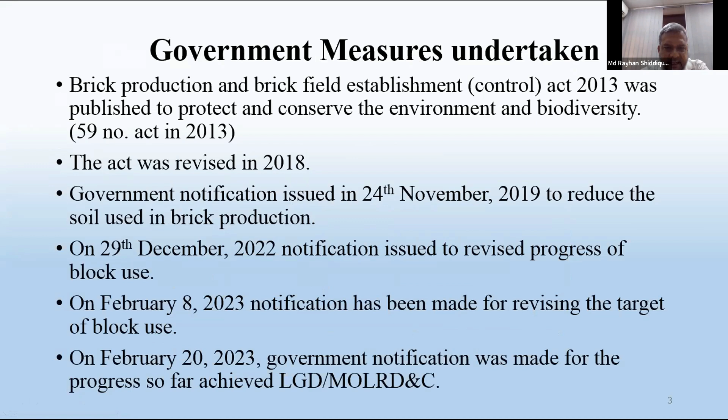In the order, it is said that instead of traditional bricks in building construction or maintenance, boundary wall construction and herringbone bond (HBB) road construction, where we are using traditional bricks, the government targets that by the 2024-25 financial year, we will use 100% blocks. And this is the target you can see. So another thing: we have to come out from traditional bricks and use eco-friendly bricks.

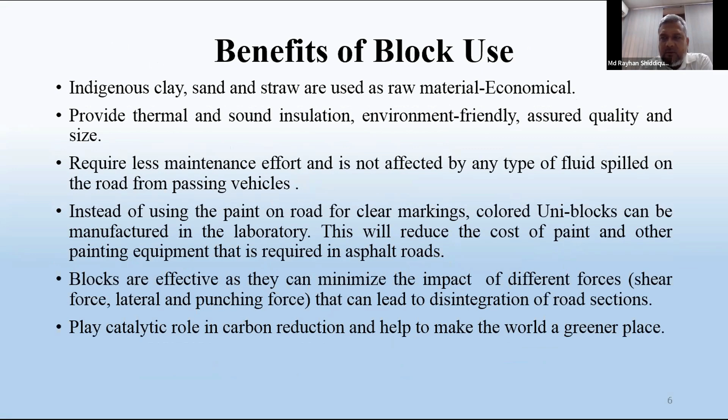What are eco-friendly bricks? They will be made from indigenous materials: clay, sand, and straw. And here carbon emission is low. And if we use these blocks, then our country can be environmentally advanced.

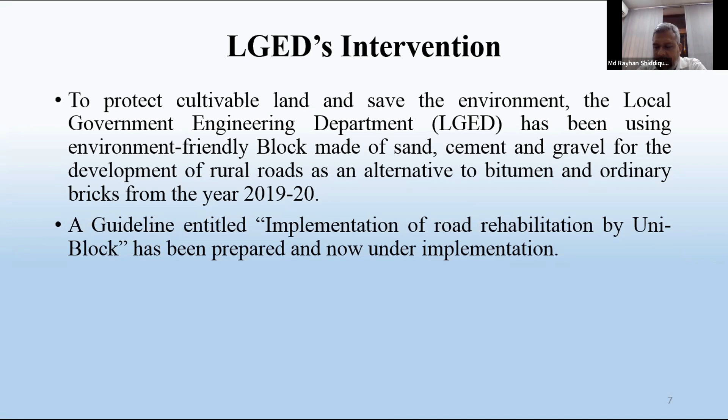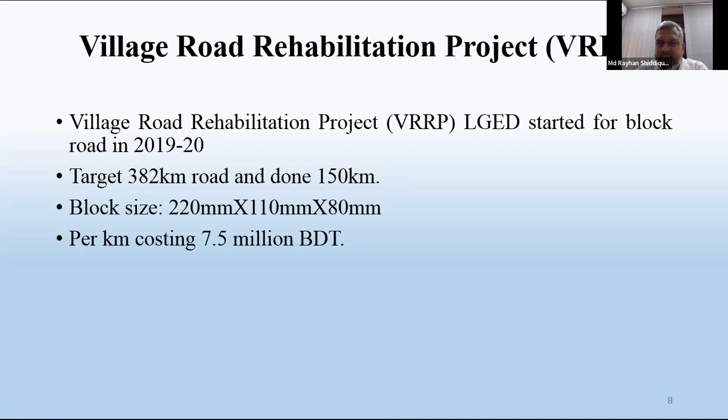Regarding this, LGED took the initiative in 2019 of using these eco-friendly blocks, and a guideline has been approved by our department. And in LGED, there is a project, the Village Road Rehabilitation Project. In this project, the target is fixed that we will construct 382 kilometers of road using block road. The block size is 220 millimeters by 110 millimeters by 80 millimeters, and we will use this in village roads. The per kilometer cost is 7.5 million Bangladeshi taka (BDT). Till now, we have constructed 150 kilometers of road. This is one project initiative.

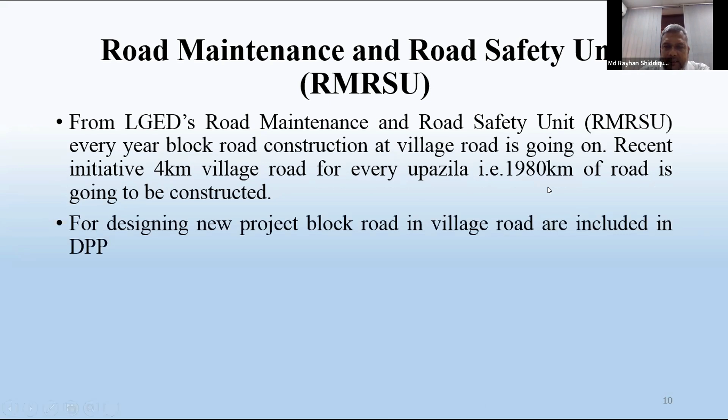We have a strong road maintenance and road safety unit, and yearly we got approximately 3,000 crore Bangladeshi taka. And by this program, every year we are constructing the village road using block road. And recently, this unit fixed a target that in 495 upazila, they will construct 4-kilometer road, that is 1980-kilometer road will be constructed.

Another design initiative by our planning unit. LGED has a strong planning unit. All the development project proposals are finally checked by this unit, and for designing new projects we are giving the provision that every project should use the block road for designing new projects in the village road.

Another two major departments, I have personally talked with them, the Public Works Department. Public Works Department, they are also following the target fixed by the Environment, Forest and Climate Change Ministry. And also Roads and Highways Department, actually there is a waiver for base course and sub-base course construction. Yes, because we have to think of the demand and supply. How many bricks are we constructing? If we are not getting the alternative, so that is why for base course and sub-base course in road construction, there has been some waiver.

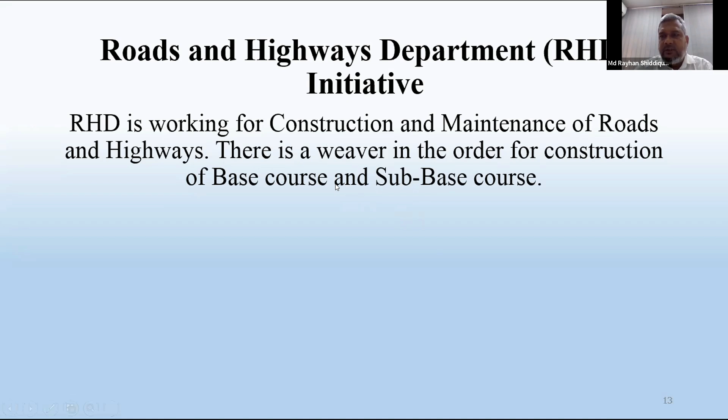So they are constructing major roads and highways. So they are taking some initiative for innovation of alternative material. How can we reduce the use of traditional bricks? So my recommendation is, the public sector has been working on block road construction, but what about the private sector? In the private sector, building and other things, we have to think about that.

And brick production and utilization analysis are needed. What is this? Every year we are manufacturing these bricks. So these bricks are utilized in different sectors, public sector, private sector. In the public sector, road construction, building construction, footpath construction, and different ways. So we have to analyze, and according to plan, I think we have to also include the private sector to motivate them not to use the traditional bricks. So in that way, we can phase out the use of traditional bricks. You can see in the block road, the maintenance cost is very, very low. So we can easily use this.

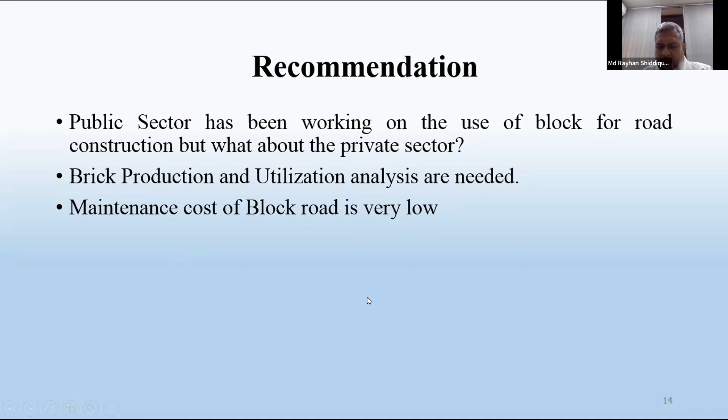From my side, this is my presentation. But actually, our country is a highly densely populated country, and from every sector we have to take initiative for using the eco-friendly brick solution, and not to use the traditional bricks.

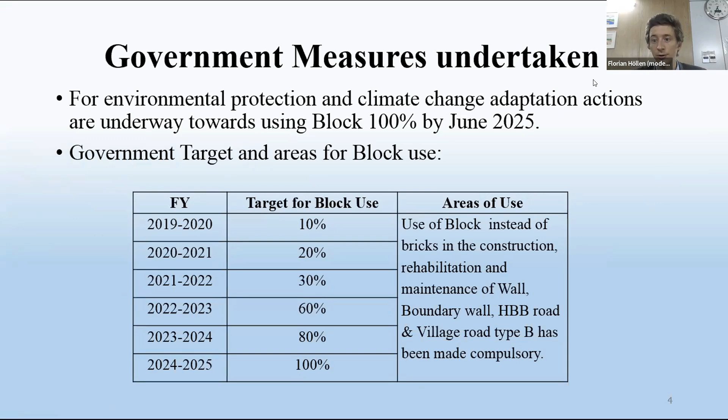Thank you, Mr. Sidike, for giving us not only an idea about the genesis of these political decisions and the different steps taken at different points in time by the government, but also the different approaches by the different institutions who are related to construction and thus also to the adaptation infrastructure and the initiatives, but as well the challenges that you mentioned, the demand and supply question, so that there is, as it seems, not enough supply, if I got it correctly. And also one major point was that now we are talking about public procurement, which is often spearheading new innovations, but we should not forget about the private sector. And this is something I think we need to take into account.

I have just one question for clarification. If you are talking about blocks, what exactly do these blocks consist of? Actually, the block consists of sand and cement. And in some cases, if we want more strength of that block, then we can use some coarse aggregate, 6 millimeter, 7 millimeter down sizes. So these are the materials. Okay. The cement, sand, and some gravels. Okay. Small size gravels. Thank you.

Like, how much is the cement share? Actually, that will depend on our strength. The ratio is the cement, sand, and the pea gravel. That is 1, 1.5 and 3.

So first about my organization. Housing and Building Research Institute is an autonomous body under the Ministry of Housing and Public Works. In 1975, the father of the nation, Bangabandhu Sheikh Mujibur Rahman, established this institute, as earlier it was a center. This institute was set up for the development of housing using indigenous materials and technologies for rural Bangladesh. We do R&D for sustainable building materials and technology development. We also do environment-friendly structures and disaster-resilient infrastructure, so we have lots of work and activities in coastal areas of Bangladesh.

We prepare policy in the field of housing and building. We develop the National Building Code and housing policies. We collaborate with national and international organizations, universities, and development partners as well. We have several projects with them. We also perform capacity development programs like training for professionals, architects, engineers, and we even organize training for construction workers as well as for students.

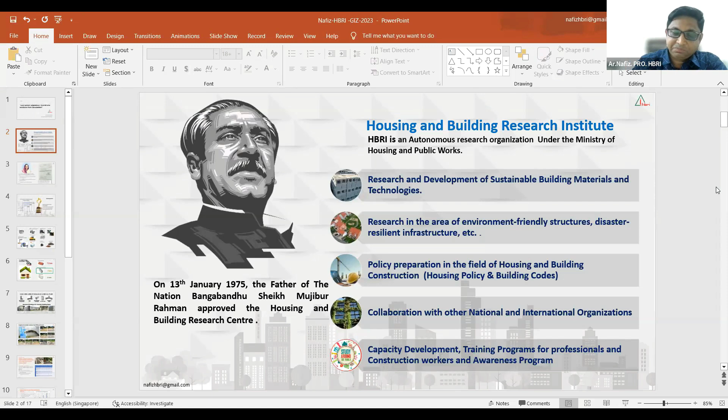Now come to this topic. HBRI has been working in this sector, developing eco blocks, 30 years back. But earlier, our perspective was only climate change issues, because we tried to eradicate the clay burnt brick with the block. But later on, in 2014, our Honorable Prime Minister visited the Ministry of Housing and Public Works, and she gave us the instruction to produce alternative blocks from dredged sand. Bangladesh is a riverine country, and we have huge silt every year, and due to this riverbed elevation, every year river bank erosion happens and people become homeless. So she gave us the idea whether we can do research and develop the block with dredged sand.

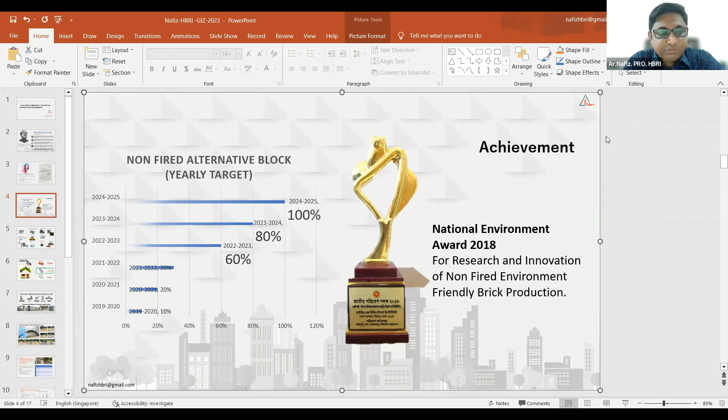They also passed another gazette notification that by June 2025, all government construction should be done with alternative blocks, green blocks. Based on our research, we achieved a National Environment Award from the Ministry of Environment. And now, to fulfill the target, we are performing several research projects, almost 27. But out of them, we are mostly focused on block development, or eco block development.

In the first research, we are trying to develop a chemical admixture to make a stronger block. We are also working to develop a block from plastic waste. You know that plastic is another problem we are facing. In another research we are conducting now, we are developing blocks from ETP sludge.

You know that the Department of Environment now has a policy of zero discharge ETP. So we can reuse the fluid, but we can't reuse the sludge. So sludge is a big problem for them. So we collected some sludge from garment industries, and we have successfully developed some blocks. You can see in the photograph.

Besides that, we are also working to develop a block using iron slag, because iron slag is also abundant in the steel industry. And we are also trying to develop aggregate from the block. You know that for roof casting and column casting, till today there is no alternative to brick, fire brick.

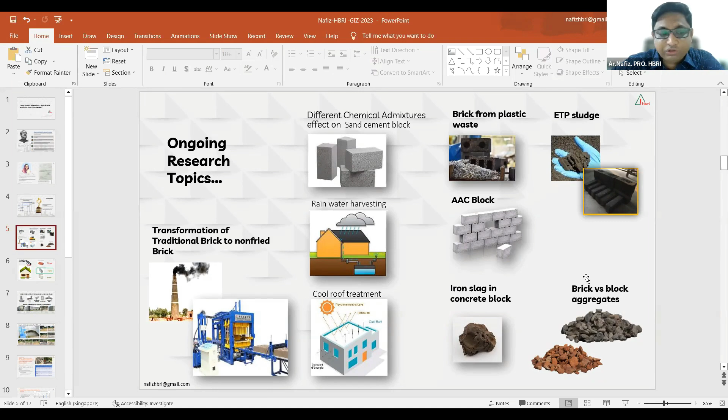And as our LGD colleague mentioned, we already prepared a block with dredging sand, which is more than 5,000 psi for them. So now they are using it in their roads and other infrastructure.

And this is another slide I'd like to share. This is the direct carbon emission that we can reduce if we use blocks. This is a typical 1,000 square feet floor house. For only wall construction, if you use clay burnt brick, it will emit around 7.2 tons of carbon for the construction period. If you use hollow block, it can reduce almost 3 tons; the emission will be 4 tons.

And if we go further and use AAC blocks, autoclaved aerated concrete blocks, it will emit less, 3 tons. You know that cement is also not environment friendly, but due to the porous and lightweight nature, we get this benefit. From the beginning we are focusing on hollow concrete blocks, and later on we'll focus on AAC blocks. These eco blocks and eco technologies are in the pipeline in our market, and products are available.

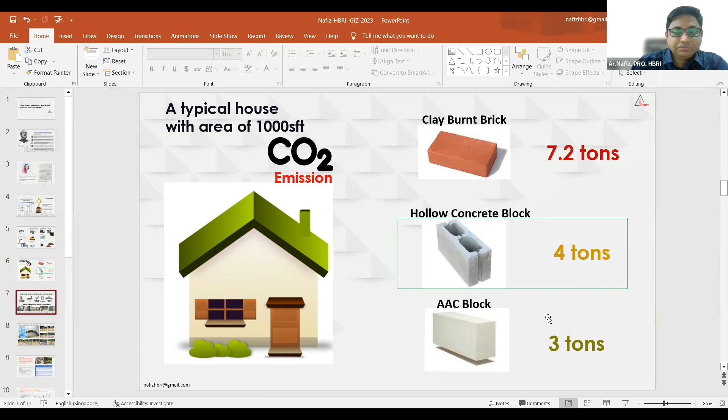This is another innovative building method we have developed at our institute. We developed sand cement block, as I mentioned earlier. We developed CSEB, compressed stabilized earth block, sand cement solid block, thermal block, interlocking blocks, and we use these blocks in our buildings. We made some pilot projects on our premises and in other parts of the country, observed them for a long time, and now these blocks are tested. We have 30-year-old buildings and 10-year-old buildings.

So these technologies are tested, because people used to ask us whether brick's life is long, but what about the concrete block? So we did research, and as the sand block is like concrete, its life will be more than 50 years, up to 100 years. So there is no risk to use this sort of block.

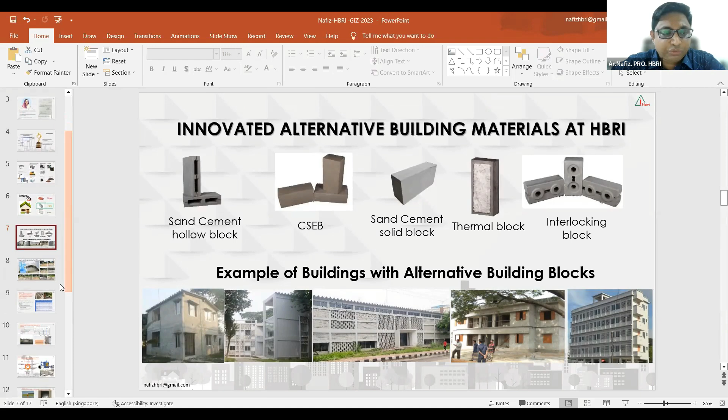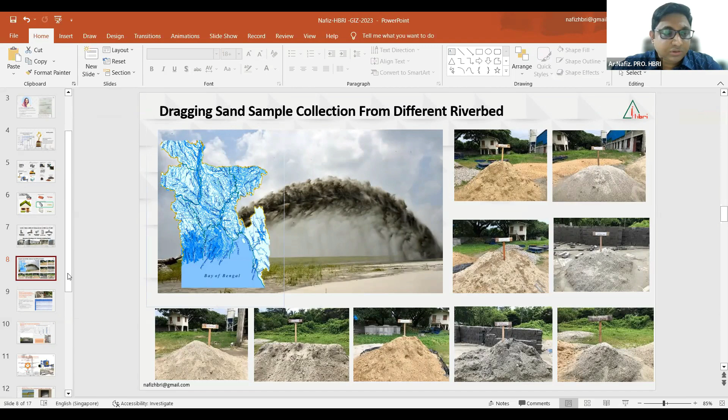So we note down the FM, fineness modulus. Fineness less than 2.5 is fine sand here, and then specific gravity, salinity, because some parts of Bangladesh, mostly the coastal part, have saline water, and TDS, pH, and other things. The block is mostly made of cement, so that's why we need to know the sand properties, so that we can give them a recipe for better bonding.

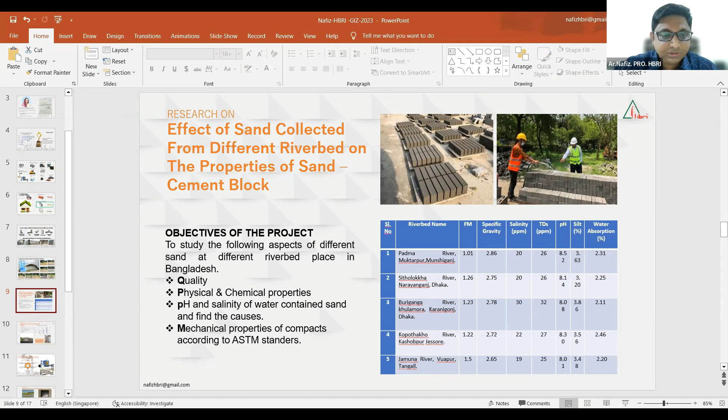And we have another program. Actually, I started this when I was working in SREDA. At that time I used to work with one GIZ program, the REAP program. We provided support for rice husk rice parboiling systems to improve the energy efficiency of rice parboiling.

And during my visit, I found that we improved their parboiling system and made their production cleaner and more energy efficient, but they were facing a huge problem with the ash. There is no use of rice husk ash, so there is a huge problem of dumping the ash. So I started working with this ash and developed a protocol to make blocks and bricks from this rice husk ash.

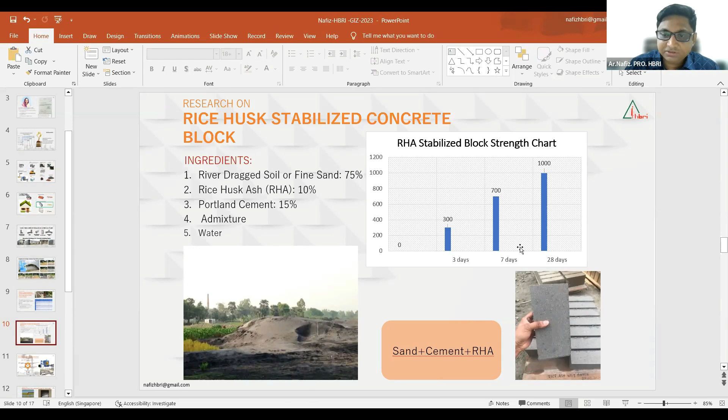And what we found, you can see the strength: after 28 days, the strength of this block is 1000 psi, pounds per square inch. This is very good for walls, and it has good insulation properties and other properties as well. One paper was also published on this research. And this is another research, I think the most timely research we are now pursuing at our institute.

We have officially almost 7,000 brick kilns, but unofficially more than 11,000 brick kilns in Bangladesh. This is the traditional building technique. It requires coal burning, almost 5.68 million tons, and it requires 3,350 million cubic feet of soil, mostly topsoil. And it emits almost 15.6 million tons of carbon.

So now our target is to convert these traditional brick fields into what you see on the right side of the slide, the alternative and new technologies. We are working with the traditional brick owners association, trying to educate them and invite them to convert their factories. This year we submitted a project to our Ministry of Environment and Climate Change to support at least 20 pilot projects.

But this is a huge market. From our findings, a 700 million investment is required for this transformation. So a huge investment program can be done, and we are looking for development partners and technical partners for this project. There is a huge appetite in Bangladesh.

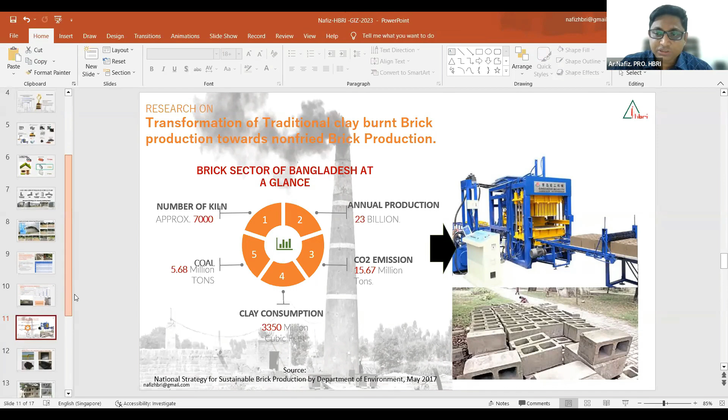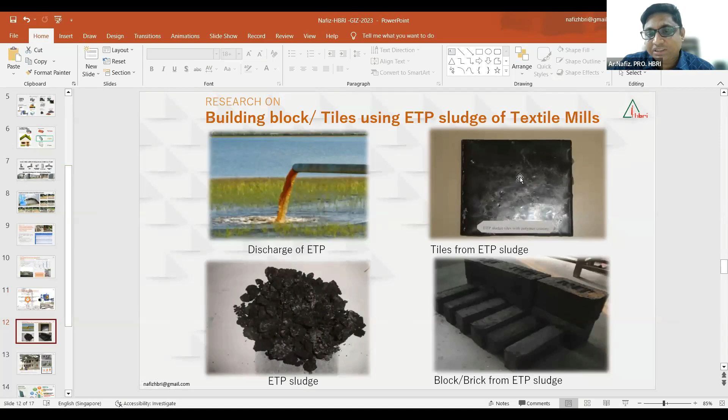As I stated earlier, this is the ETP sludge block. ETP waste is all dumped on agricultural land, so we prepared good tiles and blocks successfully at our institute. And this is another research we performed 15 years back: the first totally recycled building from demolished concrete buildings.

Usually they dump demolished blocks on agricultural land and some road networks, but the economic value is not there. We prepared blocks with this, and the strength is huge. After 15 years, the strength has gradually increased. If you use cement-based blocks, the strength gradually increases. So this is another good finding we have.

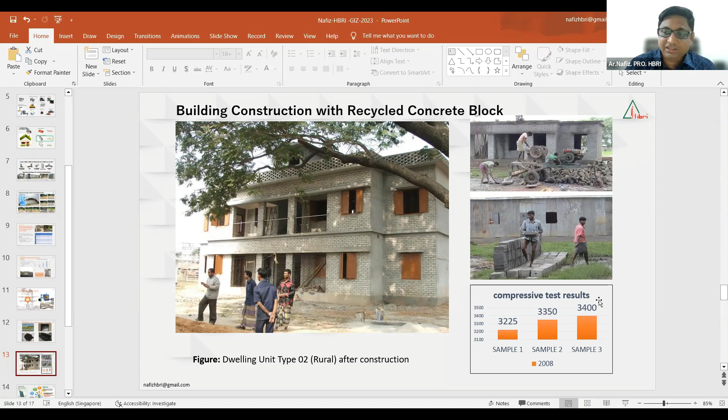We included the block provision in the National Building Code. We also developed another standard guideline for rural housing. We mentioned the provision for this block in the national policy and also in the building energy efficiency and environment rating, so anyone using this rating has to use concrete blocks, eco blocks. Even Bangladesh Bank has a financing policy in which blocks are also mentioned.

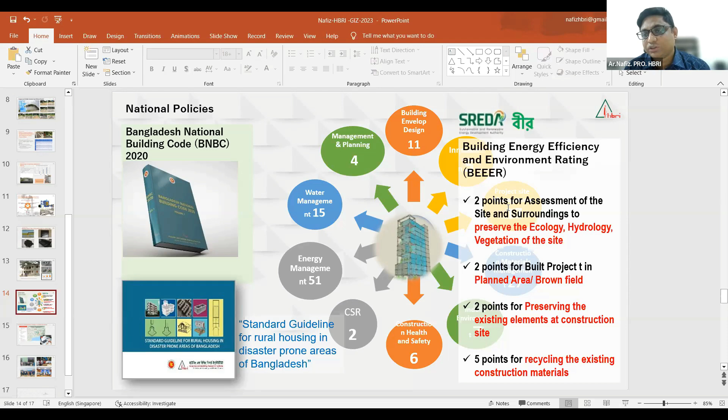This is another work done by us. We prepared a map on our website, so anyone who wants to use blocks in his nearby area can search our website and find the producers, companies and factories, making it convenient for block users. Nowadays we are also listing machine suppliers, admixture suppliers and cement suppliers. So we are trying to make a platform on our website to help these activities.

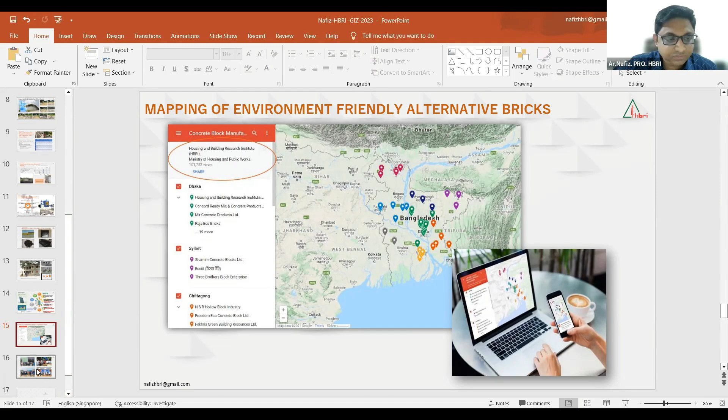We actually almost every year visit some block factories just to promote and to find out their problems, to troubleshoot their problems. And almost every day, block entrepreneurs come to us and they seek support from us, and we provide support. Sometimes we write to NBR for tax relaxation, sometimes we write to the Department of Environment for environment clearance, and sometimes we write to banks for their soft loans.

So actually, we are from HBRI. We are working as a help desk here to achieve the target set by the government by 2025 to use blocks in all government buildings. And beside that, we arrange some TV shows and other programs as an awareness part, so that the normal private sector also comes up with the use of blocks.

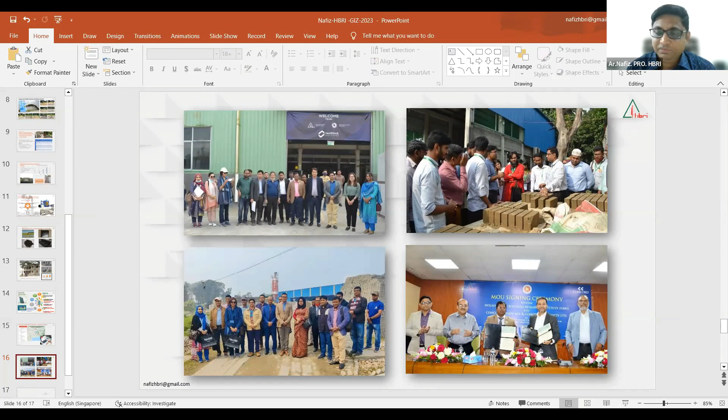Great. Many thanks, Dr. Nafisur Rahman. You gave us a very intense presentation. I always wanted to interrupt, seeing the time, but every slide was so great that I didn't know where to do it. So many thanks, because you gave us a concrete idea about the different options that are there, the very wide spectrum.

And I think one aspect we can look into during our discussion after the two other inputs is the question of how far the bricks we are producing are also recyclable, or what happens to this matter afterwards, particularly if we are using effluent treatment plant sludge or also plastic. And thanks also for putting up the topic that cement is also not environmentally friendly, and differentiating between the different alternatives we have.

From this very wide spectrum of activities and research findings you presented, I would like to go over to someone who is, with his company, a social enterprise from Belgium, actually building houses with eco-bricks in Bangladesh, Mr. Willem Gaines. He's the managing director of Inclusive Home Solution Limited. You have been doing research here and have a long history in Bangladesh. And you are now focusing on compressed stabilized earth blocks, CSEB. So please share your experiences with us.

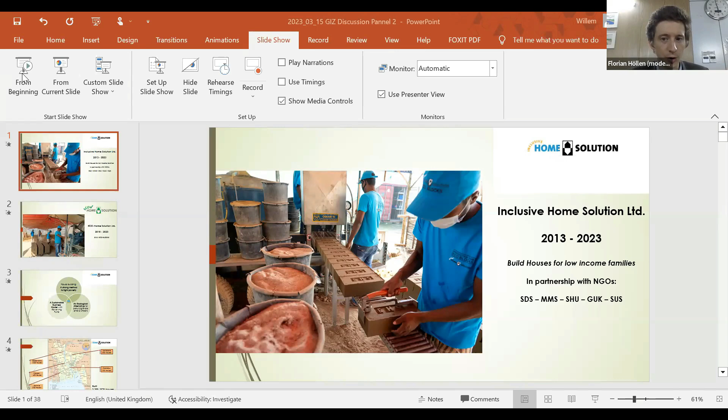Okay, thank you very much, Florian. I hope you can hear me, because I'm in a spot where the network is slow. If you allow me, I would like to share my screen. Is that possible? We hear you very well. Regarding some questions I received, it's well noted, but I would like to take them after the panelists, and then start with the questions posed already. Okay, I hope you can see my slides now? Yes, everything okay. Very well. And please try to limit yourself to about 5 to 7 minutes.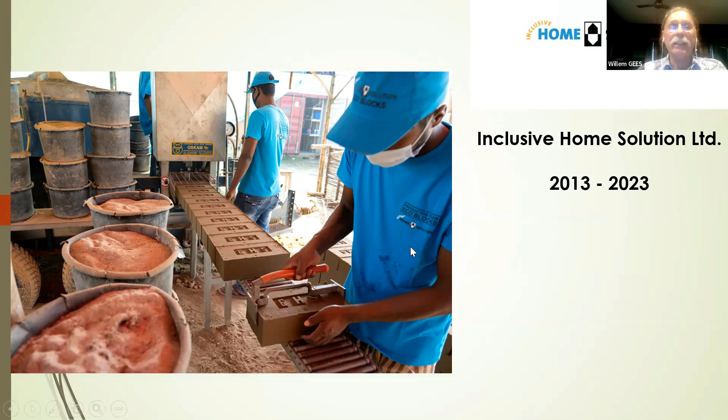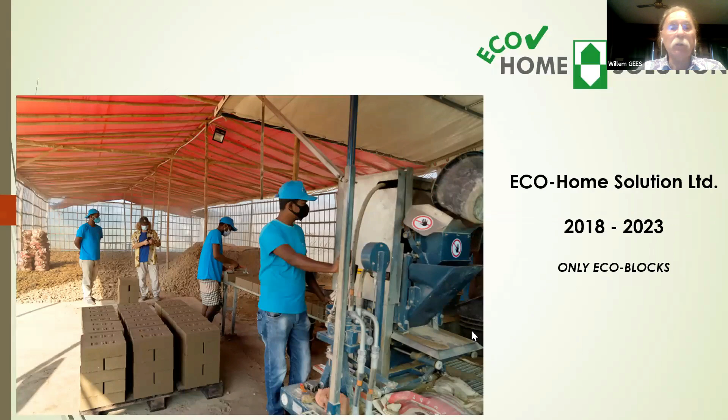I will try. So we are a company which started in 2013, especially trying to build houses for low-income families with local NGOs. And 5 years ago, we changed into an ecological project making compressed stabilized earth blocks. We try to combine our social view that a house is a strong system to fight poverty, but it should be ecological. So that's where we are fighting.

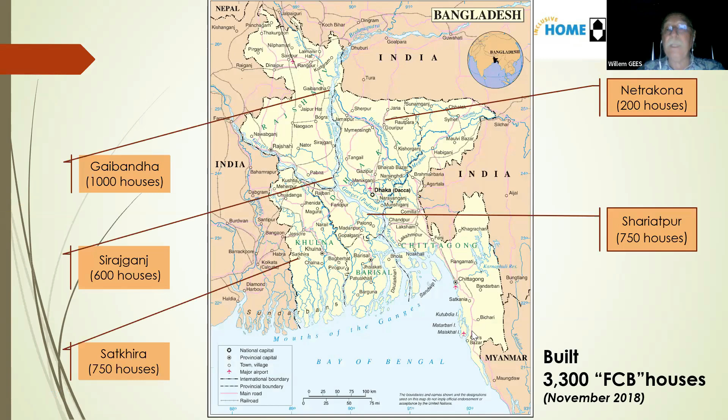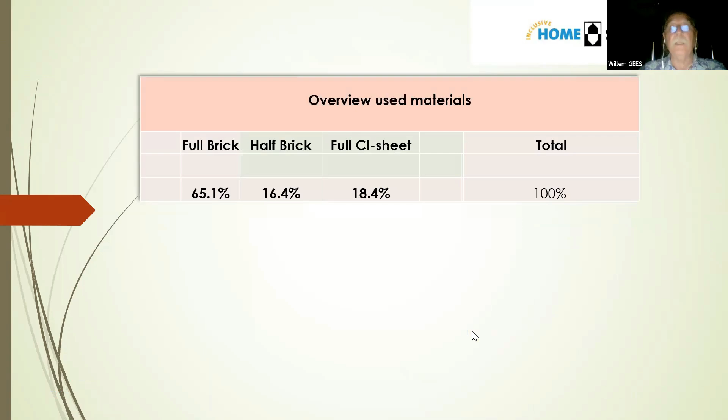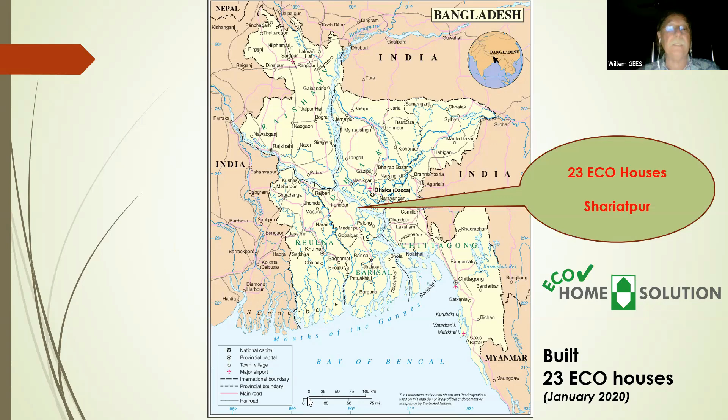We built about 3,300 houses in Bangladesh in different areas, and we saw that most of the houses were built with bricks. So that's why we decided to start an ecological alternative, and we wanted to develop compressed stabilized earth blocks. We did it in Shariatpur, where we built 23 houses. We then moved to Nilphamari, where at present we're still active, and we built 37 constructions. We are now starting in Mymensingh.

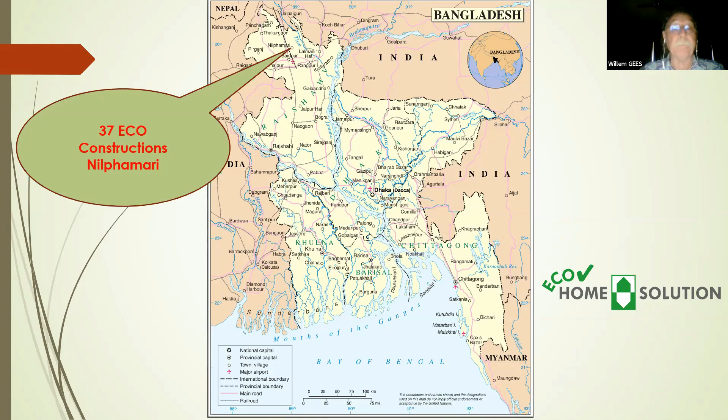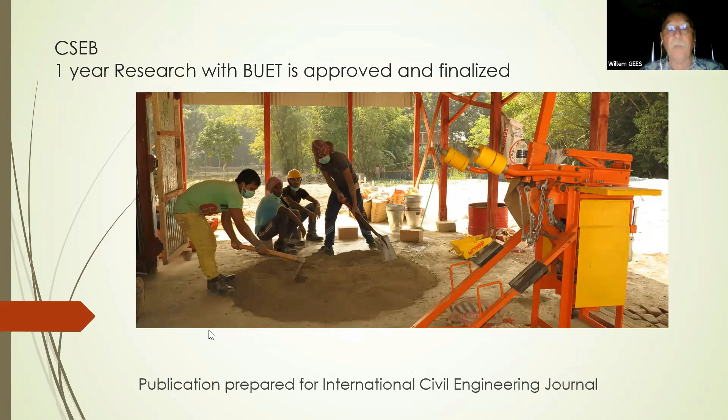Before starting, we did research with BUET to develop a compressed stabilized earth block which was high quality. And we imported a machine from India. This is the manual machine, which HBRI will definitely recognize. It's the Auram press, which we used for the research. A lot of research was done to find the right mix to have a block of good quality.

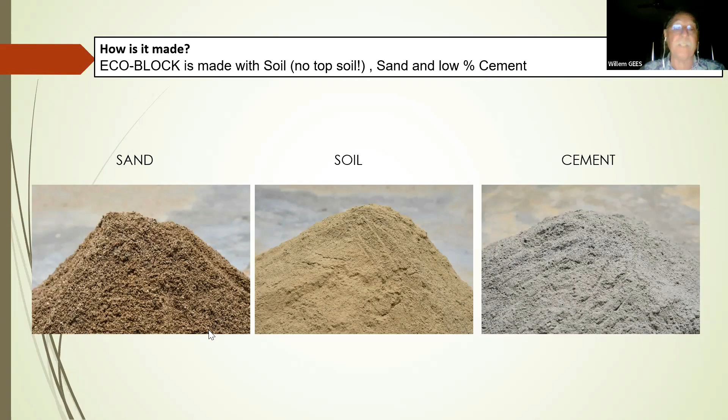So we imported the machine from the Netherlands, and this is our block. We are using sand, soil, and as little cement as possible, because we are really concerned about the pollution of cement, which is not made in Bangladesh, but we are talking about worldwide pollution. So we should not only think about local pollution, but also the origin of the cement, which is burned. And during the burning process, we all know a lot of carbon dioxide is put into the air.

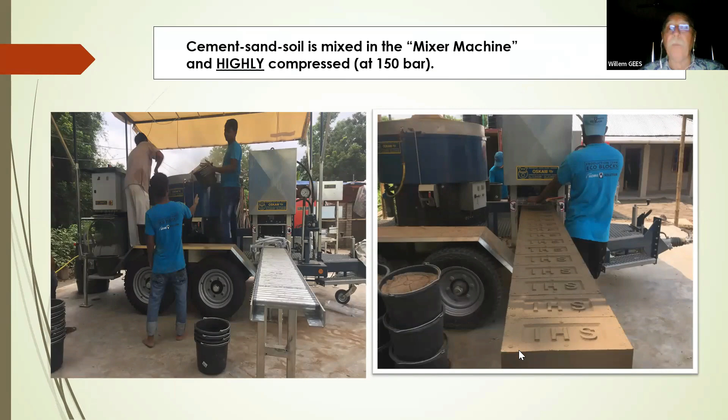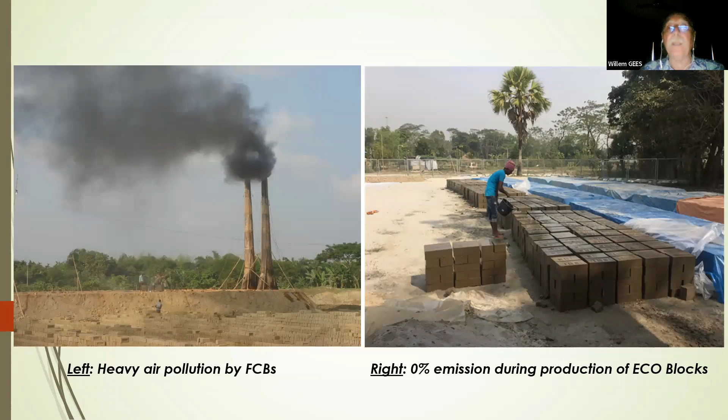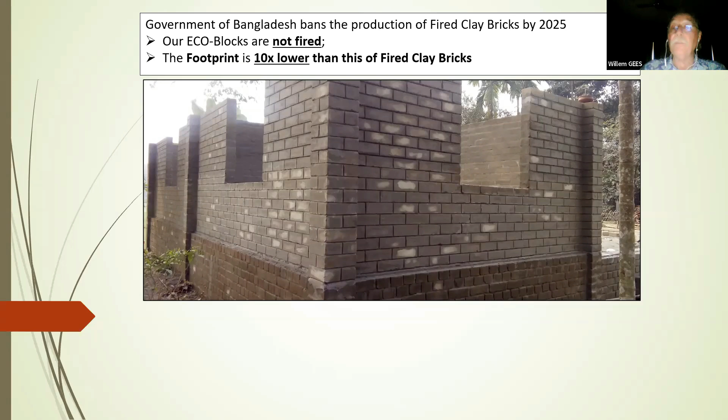So our blocks are compressed under a high pressure. I'm just trying to see my screen myself: at 150 bar, which is quite high. And by this, we managed to get a block which has a high compressive strength after 4 weeks curing. We can always test the blocks at BUET, and left and right we can see the comparison. We have no pollution, no burning. So with our blocks the pollution is much less. And you can see here, we calculate that we have 10 times lower emission than the fired clay bricks.

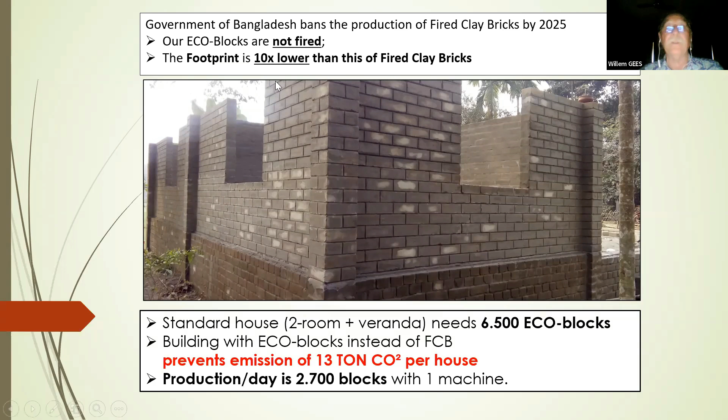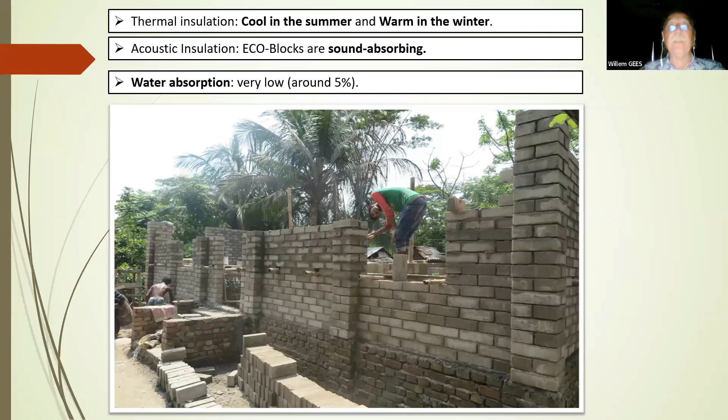Okay, during this construction, everything is not going very smoothly. We realize that it is difficult for people to accept a new product. Even if our product is very good for thermal insulation, that is also something which we consider as a plus point of our blocks. It means that less air conditioning will be needed. Water absorption is very low, and the compressive strength is 15 MPa, which is quite high.

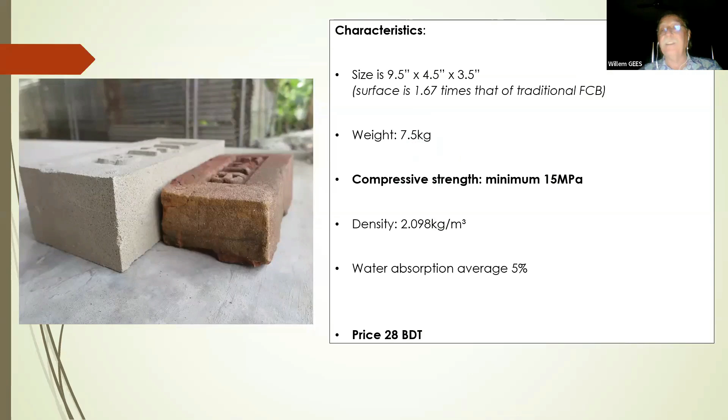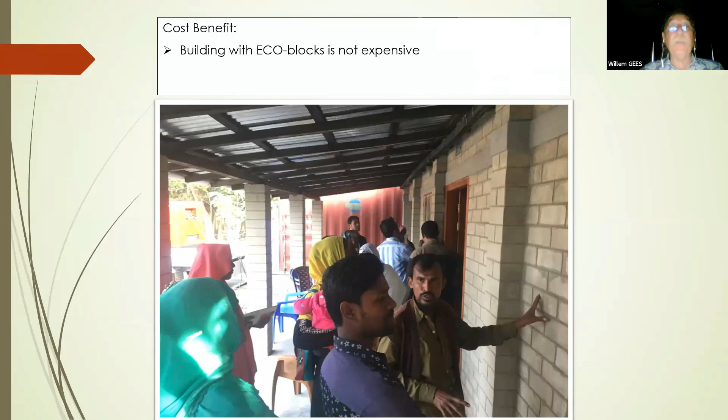The blocks that we produce are bigger than the bricks, and that is a kind of a problem, because people say the block is too big, it weighs too much. So we have to try to explain to people that, okay, the block is bigger, but if you calculate, it's not more expensive than making a wall with bricks. You need fewer blocks to make a 100 square feet wall. You don't need to plaster it, which means 30% of cost.

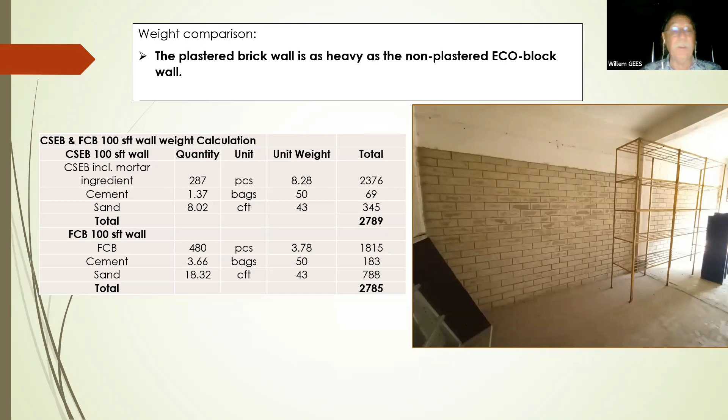And this is something we have to explain to many constructors: even if the block is heavier, the weight of the wall is not heavier compared with the plastered brick wall. We calculate it and then try to convince the people who want to build with our blocks. The block is really a sustainable block. I think it will last lifelong if you treat it properly. These blocks in Tamil Nadu are from the handmade press, and they're already 50 years old.

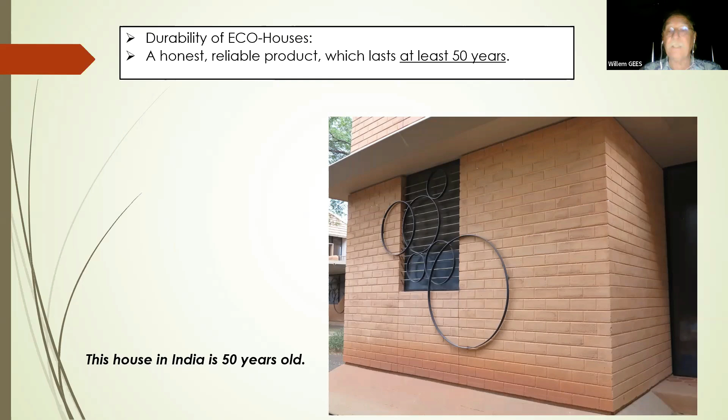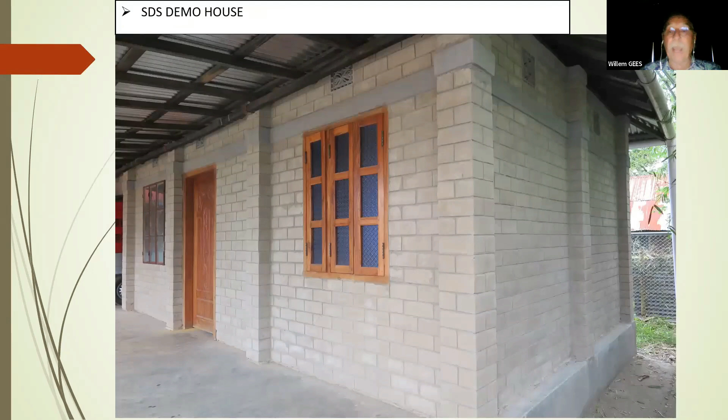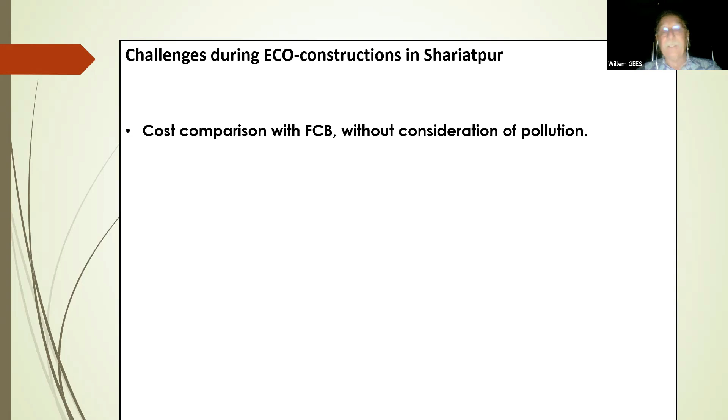It lasts long. So I'd like to share some of the construction, just to see that we built quite a lot of houses already. I will not show too many because we have no time, but they are very beautiful, very comfortable, very high quality. And we had some challenges: people always compare the cost of the block with the brick without taking into account the cost of the pollution. Pollution is a very expensive thing. We will see this for many more years due to the disasters that are coming and are creating a lot of damage.

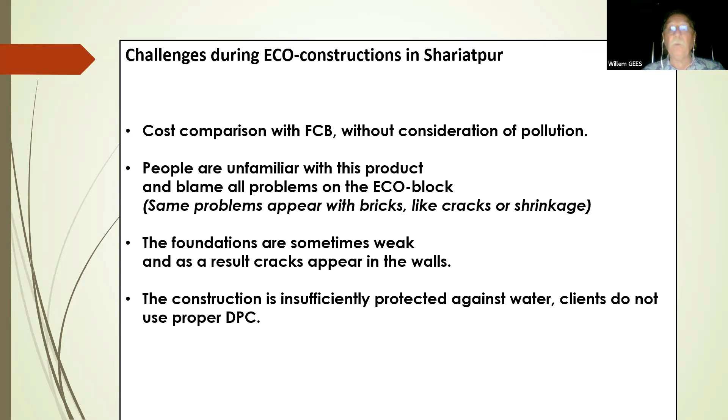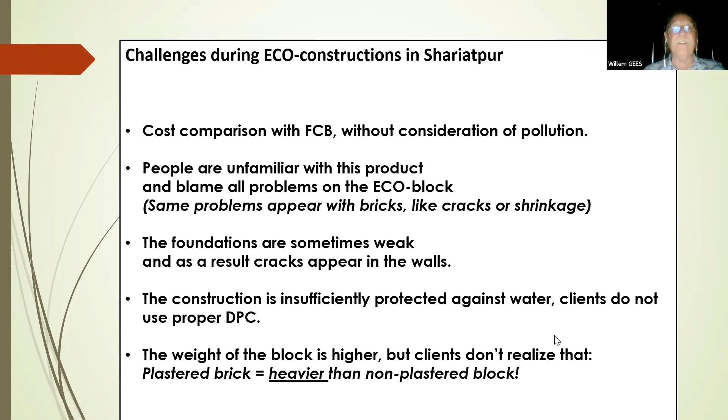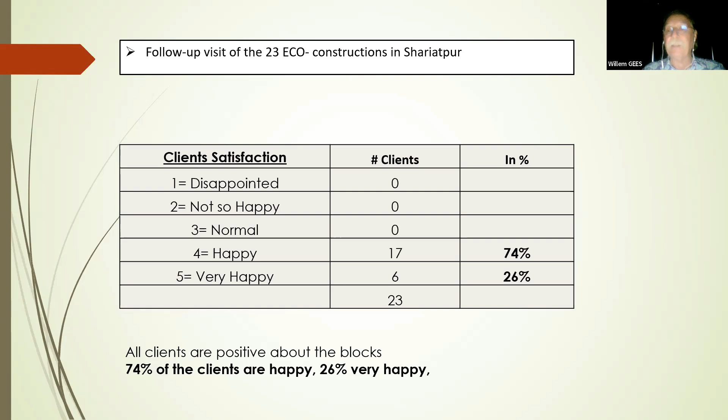People are unfamiliar with the block, and whenever there is a problem, they blame it on the blocks. Even if the same problem occurs with the bricks, they will say the block is not good. Foundations are too weak. People do not have sufficient DPC protection. So those are all problems we have to face to convince the local people to use the blocks. We did an evaluation of the people who built with our blocks, and they were all very happy about the blocks. We had nobody who was disappointed, who regretted using the block. So I think the clients appreciate it.

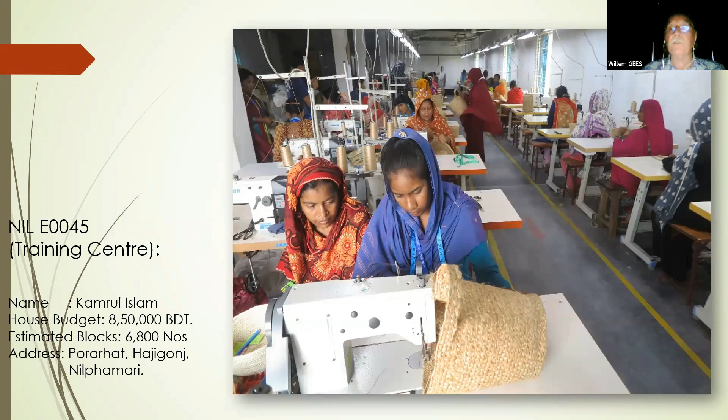Some constructions in Nilphamari, there we did more, bigger buildings. Like here, this is a 2-floor school. It's a beautiful ecological building. This is a training center for people who work in a jute factory. The full training center is made with compressed stabilized earth blocks. A bigger construction is a

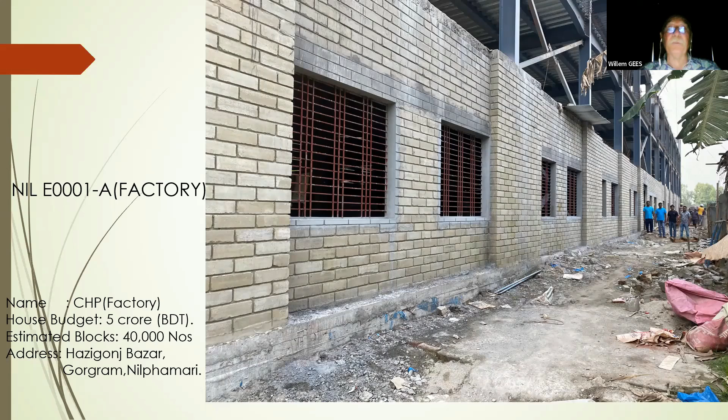3-floor factory. Unfortunately, we had the same problem here with the developer. There were some cracks in the blocks due to structural problems of their own. I mean, they made some constructional mistakes, but finally they decided to do the first and the second floor with bricks, even though the cracks were not caused by the blocks, but by the construction. Another construction is a factory.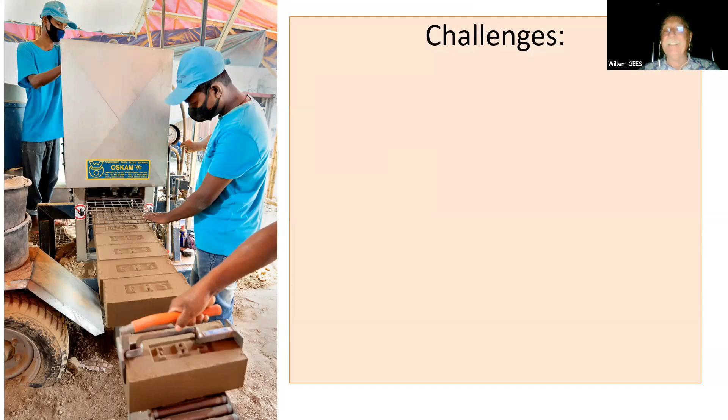And so I think we made a lot of things already. I mean, we face quite some problems all the time to convince people to use the blocks. And I think we would be very happy to have some support from the government in our struggle. We are a very small project, but we are doing the best we can for the environment.

Challenges is that we didn't get access to PWD building like in Nilphamari because our block was wider than the block which is in their schedule. It was a shame because we could have made a passport office with our blocks. Now it's made with cement blocks, which I think the pollution of the cement is higher than our block. So we are looking for ways to get our blocks accepted in the PWD schedule. We are working on that.

A beautiful support from the government we are looking for is to have a construction like an Ashyaran, which is very known and everywhere in Bangladesh, to make it with eco blocks, with our blocks, and that would be a beautiful promotion of compressed stabilized earth blocks and a demonstration that we can do it.

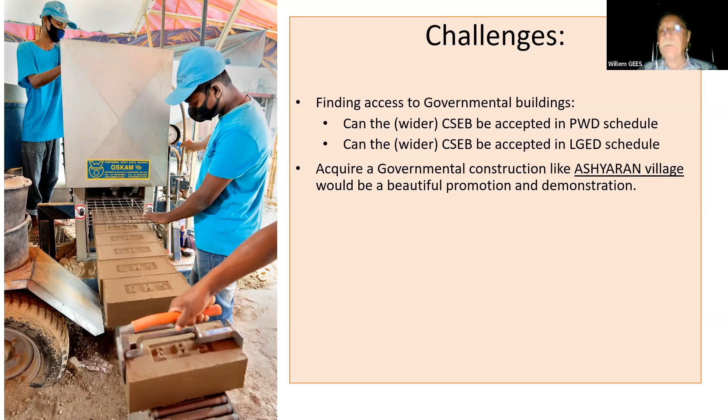In the meantime, electricity is gone here, so I'm a bit out of view maybe, yeah?

So I think many eco-friendly products need a financial incentive in the beginning. Think about electric cars. They would not be accepted if there was not an incentive from governments. This could also be done in Bangladesh. I was happy to hear that some ideas are there.

Other things could be that tax waiver or tax-free import of the machinery would be, I think, a big help for us to get our blocks at a cheap price to the public. And also finding cooperation for carbon dioxide compensation for the blocks would be very good. We are going to invest to make standard size CSEBs.

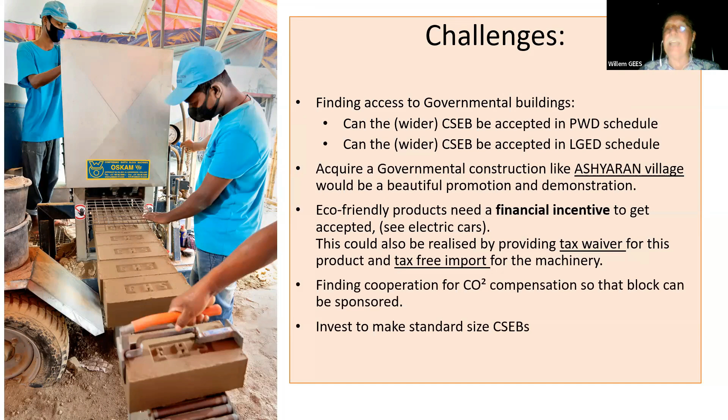So I think in general, we could say that our struggle is to get the block accepted by the public. It's not so easy, but we are not giving up and we are continuing, and getting access to some government construction would really be a big help for that. So thank you very much for having me for this short introduction.

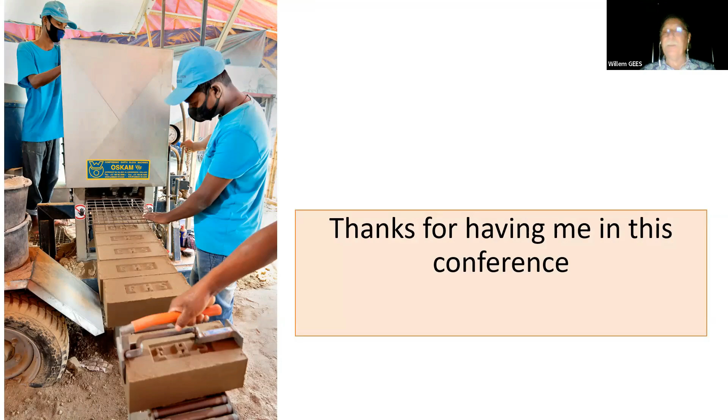Thank you, Florian. Thank you, Willem. You gave us an idea about one concrete example, which is not concrete, but compressed earth. And thank you also for highlighting, taking into account not only the emissions in Bangladesh, but also in the other countries related to the supply chain of construction materials, and going also into the challenges you face, like the difficulty

for people to accept new products, but also, as it seems, the difficulty for government institutions and the respective guidelines to include these new products, like the Public Works Department schedule and the schedule of the local government engineering division. So overcoming misconceptions and proving seems to be one part of overcoming these challenges.

And with these words, I would like to hand it over to Mrs. Salma Haque Santa. You are an architect, and you're very much focusing on not only new designs, but also on alternative construction materials, including various materials. We were also talking about bamboo, and we also saw, when I was on a project visit, one of your houses you already built. So from an architect's perspective, at the end of the day, it's you, the architects, who plan houses. Where do you see the opportunities? Where do you see the challenges for including this building material?

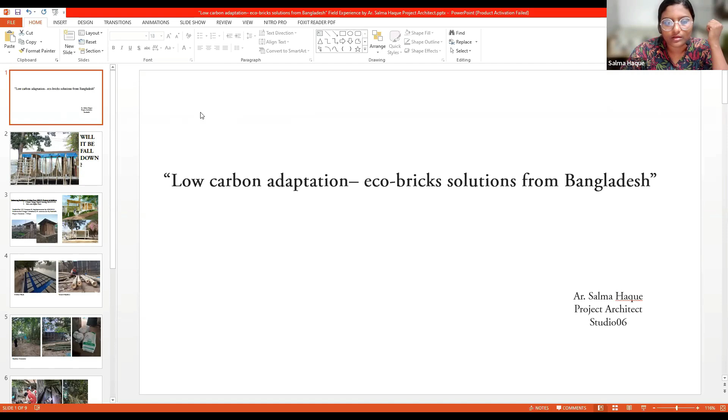We see it now, so please. Okay. Okay, now already we have come to know that a lot of people are working with blocks, and our government is taking some initiatives to work with this material. I'm working in the private sector on personal residential house design. Here I'm sharing my slide. Florian, can you confirm, can you see my slide? Yes, we can see your slide now. Okay. If it falls down, you just say so, and then we move forward.

Okay, then I must start my presentation with a funny story from my experience in field work. Last month, on one of our projects that we built with blocks, when the time came to remove the shuttering to open our roof made with blocks, one of our workers requested me to stay there with them. I was surprised and asked why, and he said, so that if it falls down, we could die together.

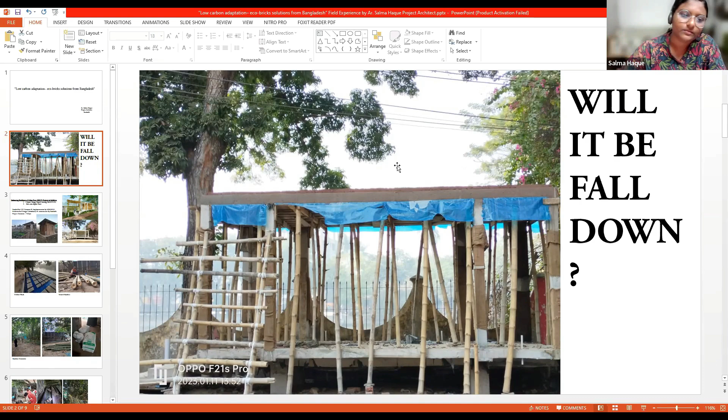It was so sarcastic, but that thought gave me a lesson. They are working there. They know the strength, they know everything, but still they can't take it in their mind. They can take it in their brain, but it's still not in their mind that this product is more stable than normal roof casting. So here I will go deeper.

I'm working as a project architect on a project funded by GIZ. It is a pilot project where we have to work with sustainable and eco-friendly material. Their topic was enhancing resilience of the urban poor in Satkhira. They mainly wanted to focus on climate change and its effects. So as designers, we thought, why shouldn't our building material comply with their thoughts? We did it within a very short time, only 75 days. It was so compact, but we tried our best to do some experimental work there.

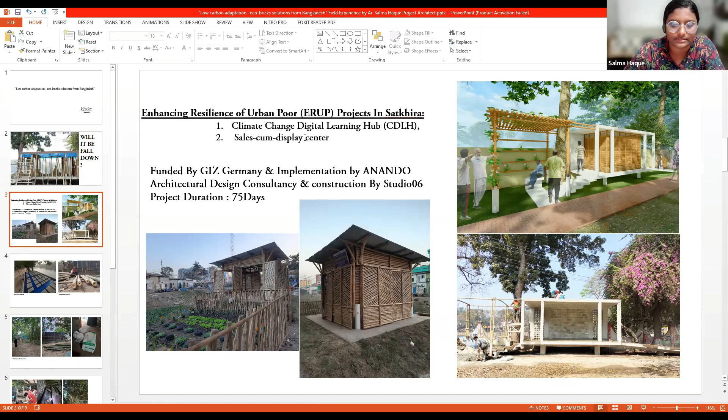There were two projects actually. One is the climate change digital learning hub, and the second was a sales cum display center. First of all, we decided on hollow block as our material for roof casting, floor, and wall. The other material is bamboo. We are trying to limit our carbon footprint through hollow block without brick.

Side by side, I'll also mention that a lot of people all over the world are trying to save our land by using bamboo, because bamboo is a wonderful material, so sustainable. If we treat bamboo properly, it is a lifetime material. So we considered it for our wall or partition, so that we don't need glass and other brickwork for our walls.

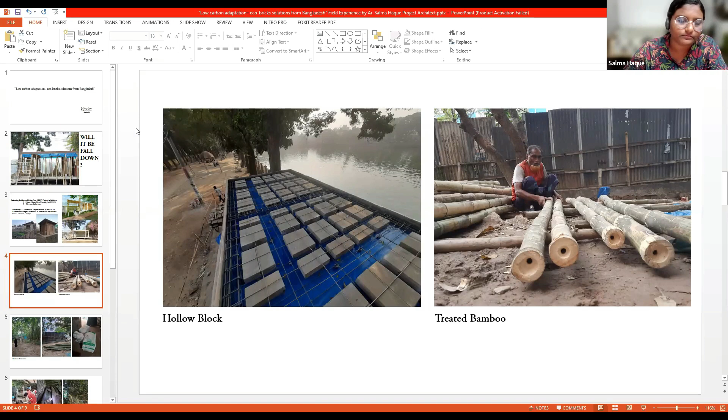Nafis bhai and others already explained the beauty and the impact of block on the environment. I would like to add bamboo to that. In our surroundings all over the country, in our villages, we can see that a lot of bamboo fields are abundant. People don't know the use of it. They just abandon that material, and people only know to use bamboo for fencing or low maintenance purposes. But if we treat it, it will have a long lifetime.

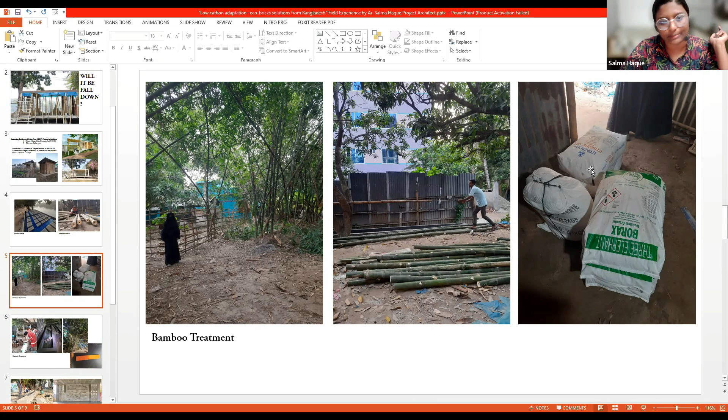So at the very beginning of this project, I did a training on bamboo treatment and took the challenge to do that in Satkhira and use this bamboo for walls. There are some technical issues with bamboo, and we used a chemical called boron. You can see here in the image boric acid and borax, two types of chemical that contain boron, used worldwide for treating material, and whether bamboo is treated or not, we can test it by hand, on site.

Here I can show the result of a treated bamboo. This part of the bamboo is not treated, and this part is treated. And this testing is so easy. Our labor can use it, or we can educate our people, and they can use it frequently.

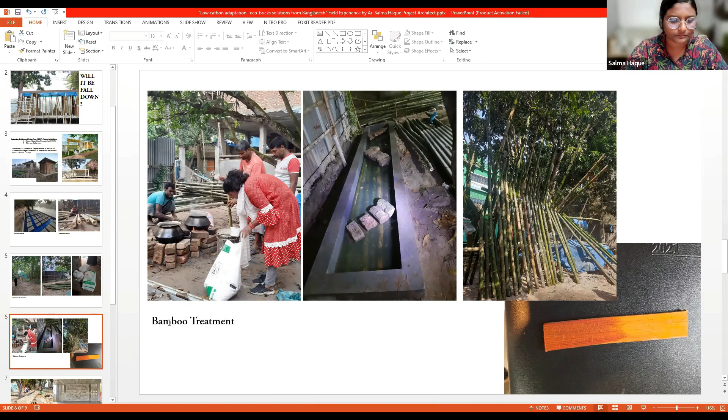Now I come to blocks again. I'm talking about the challenges, my experience from site. When we first proposed to the Purasabha, or municipality, and the funding agency that we would like to use block for our structural portion, they were so terrified and confused. Would it be fine? Would it fall or anything?

I can remember one day when we started this wall, one respected person just called, stopped us, and asked whether it would fall down. After a lot of conversation, he asked, are you sure you are going to use this? And at that time I had to say that I'm taking the responsibility. Please use this block. Give me the opportunity to use this block.

When people pass by, this structure has been built in a very reputed park, Rajak Park in Satkhira, that is the main point for gathering people. People pass by and they give a comment: Why are you doing this? You are wasting a lot of money and everything. Most of the time I smiled and tried to give some advice.

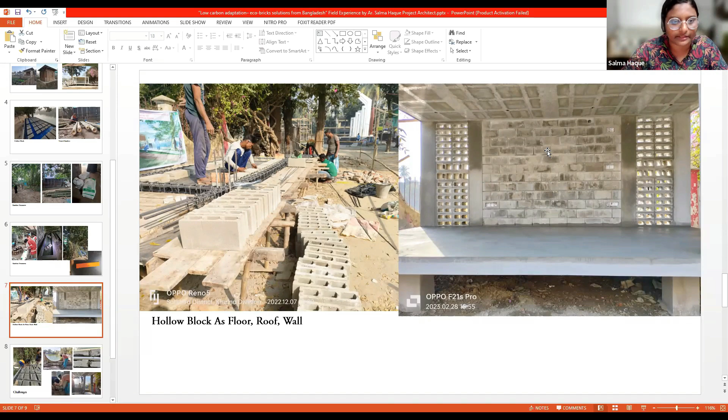Also, here we can see the end result of workers who were very angry at first with me. They were very angry, but at last they were so happy to see the beauty of the blocks and working so fast with them. They were sad for their profit, but they were happy that this element is so convenient for their structure. Their house can now be a building, not a tin shed.

They could build their house with concrete. They are happy because block is cheap rather than brick or dhalai. And the bamboo workers here were also irritated by treating bamboo, because treating bamboo is a long process. But they have done it, and at last they admit that this bamboo has become so hard that we use it in different ways, putting out, putting in, but still the bamboo is not damaged.

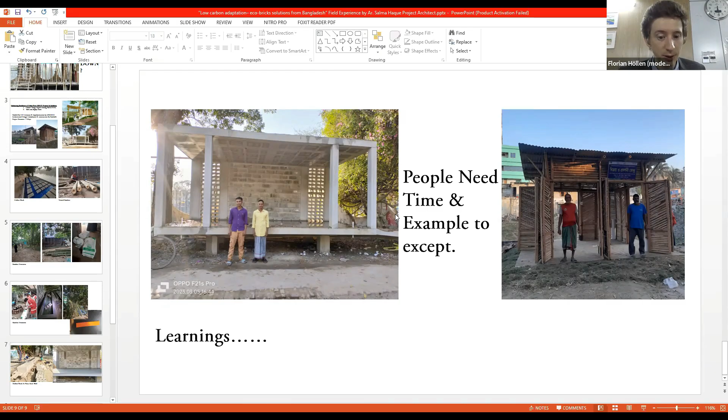And I have already received one question I would like to pose. This is by Nabil Haq. Cement is not prioritized in the revised NDC of Bangladesh. So is there any study that discusses how much cement per capita consumption will rise if 100% of bricks are replaced for public construction? This will change the emission profile of the country.

I think this assumes that the eco bricks have a high percentage of cement, which is maybe not the case, but still, some eco bricks have like 10%. So the question is there. Maybe Mr. Nafisur Rahman, do you know from a research perspective any kind of answer in this regard?

Okay, you already mentioned that we usually use 10 to 15% cement in these blocks. And in one of my slides I showed that if we replace clay bricks with blocks, it can save 3 tons for 1,000 square feet of house. I gave that one example. So it can save almost 40% of carbon emission. So I think if we totally convert to using cement in block production, it will not increase the carbon emission. It will definitely reduce the emission.